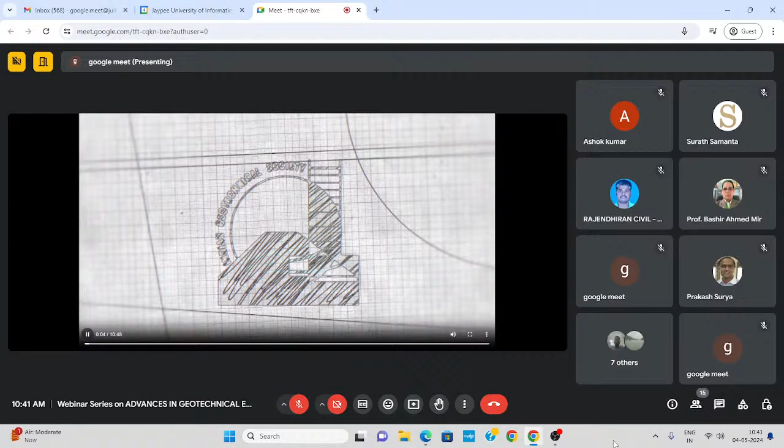The Indian Geotechnical Society, which was earlier known and founded under the name of the Indian National Society of Soil Mechanics and Foundation Engineering, was established in 1948. This came soon after the Second International Conference on Soil Mechanics and Foundation Engineering held in Rotterdam.

The society was affiliated to the International Society in the same year, and since then it has strived to fulfill and promote the objectives of the International Society. The name Indian Geotechnical Society was adopted in 1970.

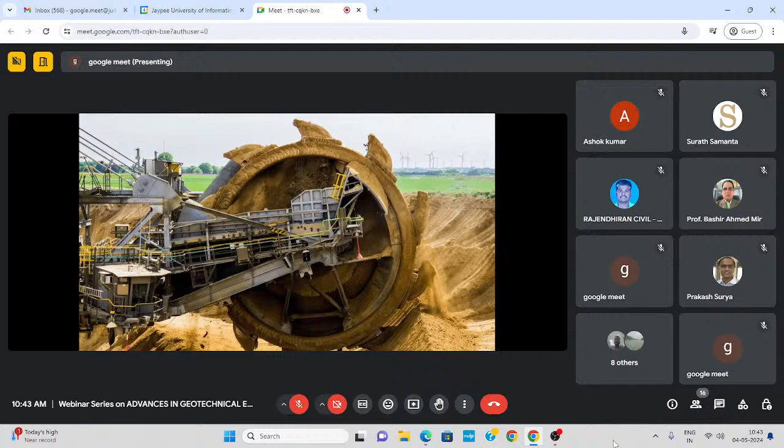The vision of the founding president, Mr. Khosla, and the honorary secretary, Dr. N.D. Gulati, was to build the society to promote cooperation amongst engineers and scientists for the advancement and dissemination of knowledge in the fields of soil mechanics, foundation engineering, soil dynamics, engineering geology, rock mechanics, snow and ice mechanics, and allied fields and their practical applications.

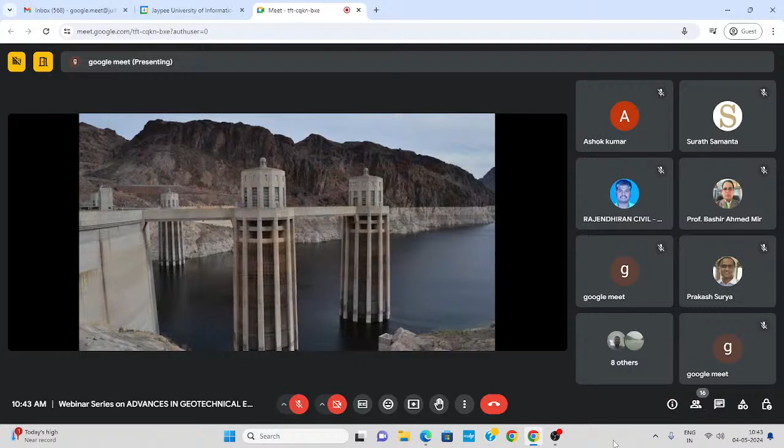As the geotechnical community started to grow, the International Society decided to have regional conferences for each continent, along with having 4 yearly international conferences. This is when the first Asian Regional Conference was held in 1960 in New Delhi. India also hosted the 5th Asian Regional Conference at Bangalore in 1975 and the 13th one at Kolkata in 2007.

IGS has been organizing national conferences annually in different cities since 1961. The Silver Jubilee Conference was held at Kurukshetra in 1973. 1978's GeoCon was a landmark conference held at IIT Delhi, which was inaugurated by the then Prime Minister Morarji Desai.

IGS started the prestigious annual lecture in 1978, a tradition followed till date. The first one was delivered by Professor R.K. Katti. Several others who delivered the annual lectures include Professor Dinesh Mohan, Professor T. Ramamurthy, Dr. R.K. Bhandari, Professor Gopal Ranjan, Dr. B.G. Rao, Dr. N.V. Nayak, Professor G.V. Rao, Professor A.V. Shroff, and most recently, Professor M.N. Viladkar.

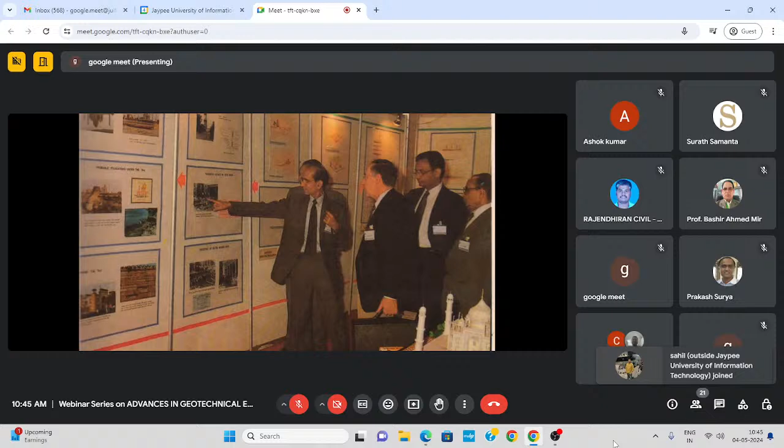IGS made an impressive debut in the international scene in 1994 with the organization of the 13th International Conference on Soil Mechanics and Geotechnical Engineering that was held in New Delhi. This was one of the biggest conferences in the history of the International Society, and it firmly put India on the international map.

24 years ago, in 1994, the Indian Geotechnical Society organized the 13th International Conference on Soil Mechanics and Foundation Engineering in New Delhi. This conference was a great success. Everything went perfectly as planned: its technical sessions, its exhibition, its field trips, its delegate interaction, its companions program, its entertainment, and hospitality.

Dr. Parry, the Secretary General of the International Society, in his concluding remarks, branded the conference as the Magic Carpet Conference. The turning point came from the 12th Asian Regional Conference in Singapore, which saw more than 20 Indian participants and the keynote lecture by Professor Madhav. We were successful in winning the next ARC at Kolkata and also Professor Madhav as Vice President for Asia for the term 2005 to 2009.

The major visible contributions from Indian Geotechnical Society have been in the latest 21st century. A large contingent had attended the Singapore Asian Regional Conference, followed by election of Professor Madhav as the next Vice President for the term 2005-2009. Several members of IGS have been members of the technical committees,

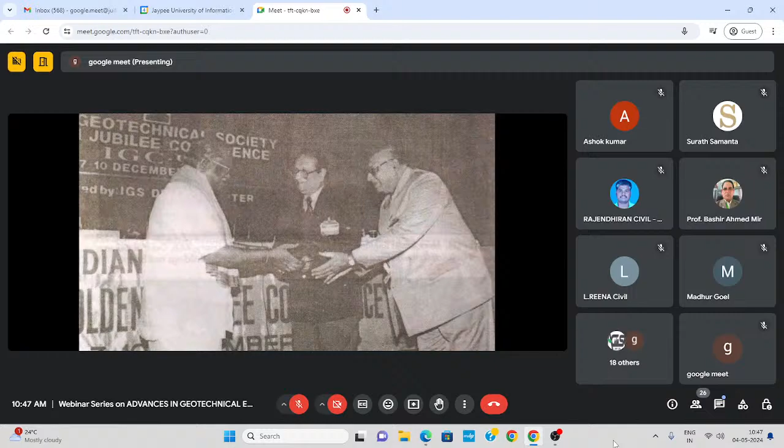The Golden Jubilee Conference was held in 1998 at Delhi. IGS has hosted the council meeting of ISSMGE at Bangalore and the 6th Asian Young Geotechnical Engineers Conference very successfully, thanks to great efforts by Professor Sitaram, Professor Srinivas Murthy and the team. IGS was successful in bidding for the 6th International Conference on Environmental Geotechnics to Delhi in 2010, which was a great success due to Professor Manoj Datta's great efforts.

The international community has become aware of our true potential, with several of our members becoming active in several technical committees of ISSMGE. IGS has a full-fledged office in New Delhi catering to the needs of its members. IGS publishes a quarterly journal since 1962. It is now accessible online to all IGS members free of cost.

Since 2012, the journal is being published by Springer for qualitative improvement and international reach. It has wide circulation and is retrieved internationally. IGS also publishes a quarterly newsletter to keep its members abreast of all geotechnical events.

IGS operates through its local chapters that keep its flag high in different cities of India. With 44 active chapters, IGS has spread its reach to every part of the country. Some of the active local chapters include Delhi, Roorkee, Mumbai, Indore, Pune, Goa, Surat, Bangalore, Chennai, Kolkata, Guwahati, and several others. To encourage the chapters, an annual Best Chapter Award was instituted in 1995. The Delhi chapter has won this award a record 5 times.

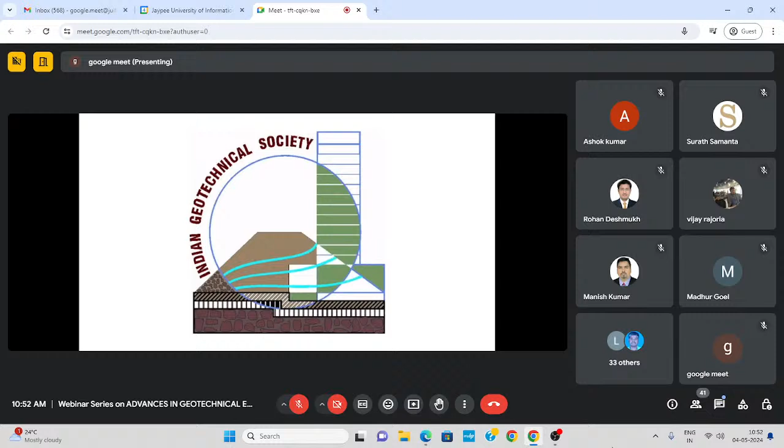Nestled among the mighty Himalayas stands a temple of education, an institution that shapes young minds of today into ambitious, conscientious, and dauntless individuals. Individuals who will become leaders of tomorrow. This is Jaypee University of Information Technology, Solan, where education meets excellence. Conceived as the joint vision of the Government of Himachal Pradesh and the founder-chairman of Jaypee Group, Shri Jaiprakash Gaur, JUIT Solan is the first private university of Himachal Pradesh, established in 2002.

Over the last 2 decades, JUIT Solan has been relentlessly pursuing its mission of contributing to a better world by cultivating creativity and advancing fundamental knowledge through education among students. Adorning the picturesque slopes of Waknaghat hills in the Solan district of Himachal Pradesh, the university campus spread across 25 acres provides a peaceful and serene setting in the lap of nature for young minds to hone their skills for a brighter future.

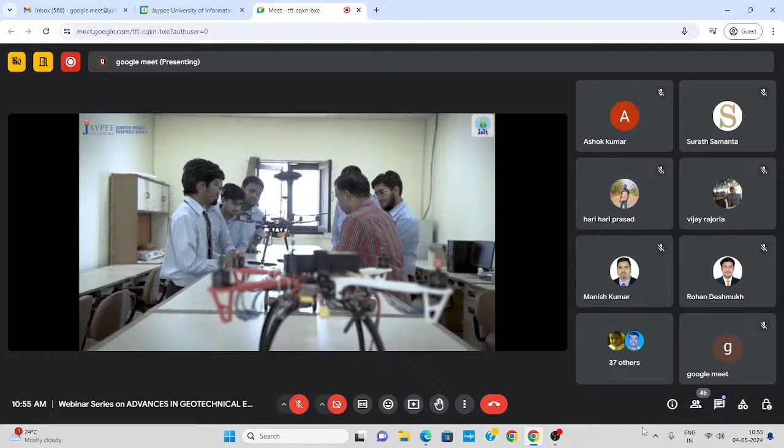As Dean Academics and Research, I have had the privilege of witnessing a remarkable journey here. We aim to provide an educational opportunity to one and all, irrespective of their background. In JUIT, our main aim is to produce industry-ready professionals and good human beings. From the beginning, our institution has been known for its research and innovation, and now it emphasizes interdisciplinary research and collaborative work. We are also aligning with the principles of NEP 2020, and following NEP, we are preparing the students to excel in their professional journey.

We have been continuously ranked in NAAC and NIRF. Now we are also ranked in international rankings such as the Times Higher Education ranking and QS ranking. We regularly upgrade the IT infrastructure at our university. Recently, we have added a good number of new machines in various labs. With modern hostels for both boys and girls, faculty residences, a healthy and hygienic students' mess, auditorium, sports facilities, and other amenities.

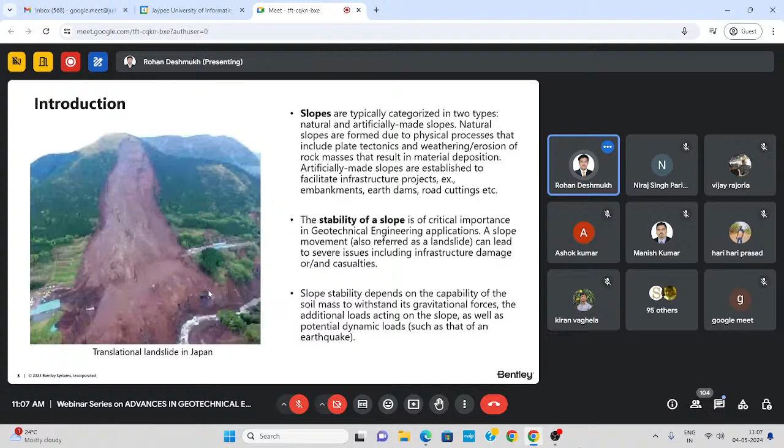Okay, so this is all about the introduction about the slopes. Now, what are the different reasons or the causes which lead to slope instability or slope failure? So the very first and the very common one is the increase in weight of the soil because of saturation, because of wetting. That is the main predominant reason behind many slope instabilities.

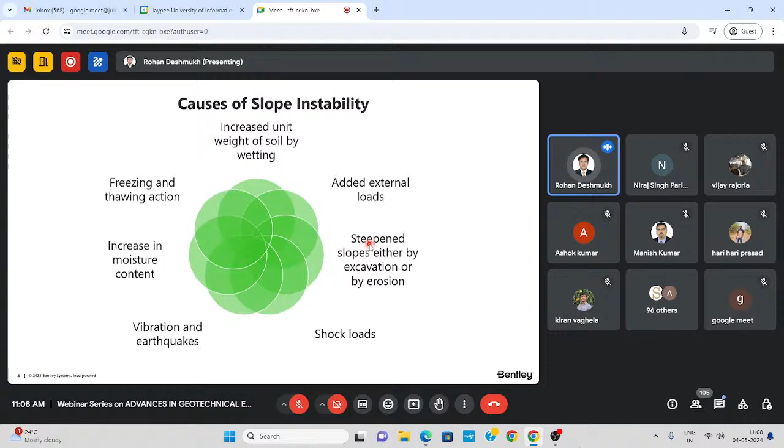Added external loads: as I just mentioned, some external loads at the top of your slopes may cause slope instability. Sometimes steepened slopes, either by excavation activity or because of erosion, are also one of the reasons. Shock loads, vibrations, earthquakes, those dynamic loads also sometimes trigger slope instability. Increase in moisture content, and in some regions the freezing and thawing action is also responsible for causing slope instability.

Now, I'll just show you some typical modes of failure and some types for a slope failure. This is suggested by Varnes in 1978. So the very first type of slope failure, which happens mainly with rocky material, is falls, where you can observe simply downward movement of rocky material. You can see that simply our rock material gets detached from its parent rock, and in the case of falls, that movement is in a linear pattern. You can see this rock fall in figure 1A, and this is an actual example from Spain, that is the rock fall.

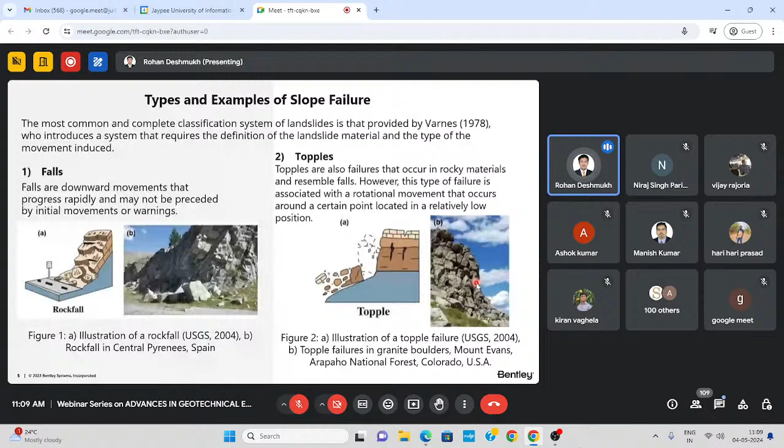Now coming toward the second mode of failure, that is topples. It is similar to that of falls. Our rocks get detached from the parent rock, but along with the linear motion, sometimes rotational motion is also there for the detached rock material. You can see this is an example from Colorado, USA. That is the topple kind of failure, where rocky materials get detached from the parent rock, and along with the translational motion, there is rotational motion for the detached rocky material.

Now regarding the slide, this is another mode of failure. It is mainly when the applied shear stress is more than the shear strength of our soil or rock, and this leads to a shear failure. Again, slides are of two types. One is the rotational kind of slide, which you can see in figure 3, and there may be a translational slide, simply downward movement of the soil material. You can see the rotational kind of failure in figure 4, and this is the example from England, which happened in 1993.

And this is the translational kind of slide, the translational slide failure. This is the example from Japan, and the reason behind it is seismic activity. An earthquake is responsible for this kind of slide failure or landslide failure. This is the case from the year 2016.

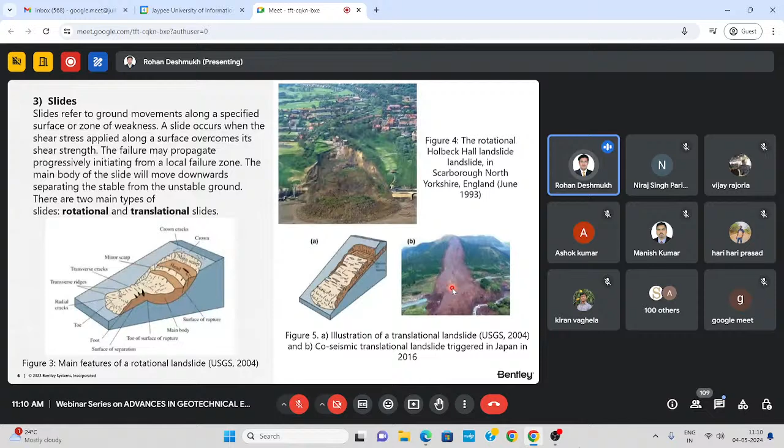Further, you can see another mode of failure, that is lateral spread, and it is mainly because of liquefaction and happens in the case of saturated soils. Because of shaking or an earthquake, the shear strength gets completely lost for a saturated soil, and this kind of thing happens. You can see this is the lateral spread that happened in Pakistan, and there is complete damage to this road or highway.

Another mode of failure is flows. The failures which we cannot categorize in the earlier four categories, we categorize in the flow category. So what will be the flow kind of failure? Simply your soil material or rock material flows along an inclined path. You can see the debris flows or the debris avalanche. These are a few examples of the flow kind of failure.

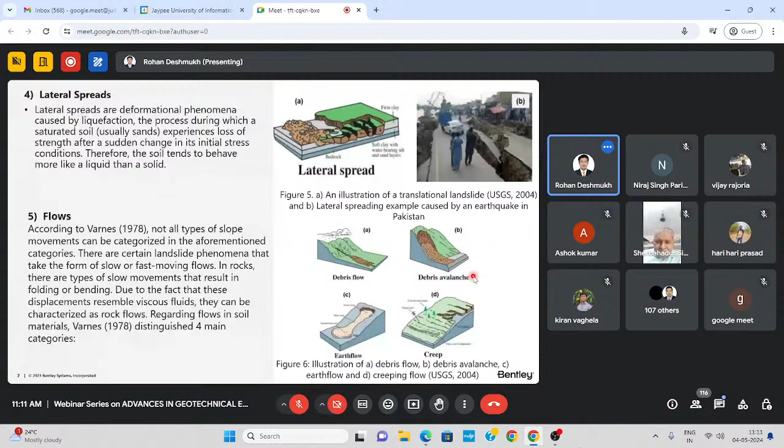Now we just discussed the different modes of failure, and now coming to India. There are a lot of examples where slopes failed because of several reasons. These are a few news cutouts which I have taken about the mishappenings or landslides which happened throughout India. This is the case from Kerala from the year 2022.

You can see that this road completely got blocked because of this landslide. This is another example from Kerala itself. You can see that massive translational kind of sliding is happening along this region. The whole soil material is completely washed out. This is another from the northern part of India.

Okay, almost 46 got killed because of this mishappening, because of this landslide. This is another photograph from the Himalayan region, over 50 killed again in that, and the rain is the factor which triggered this kind of a failure.

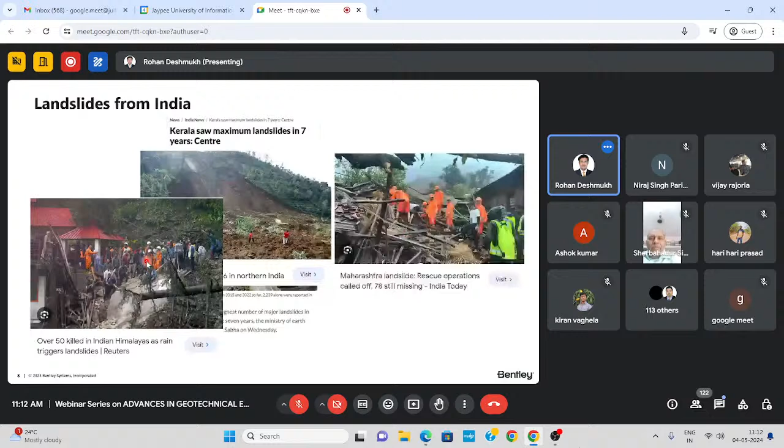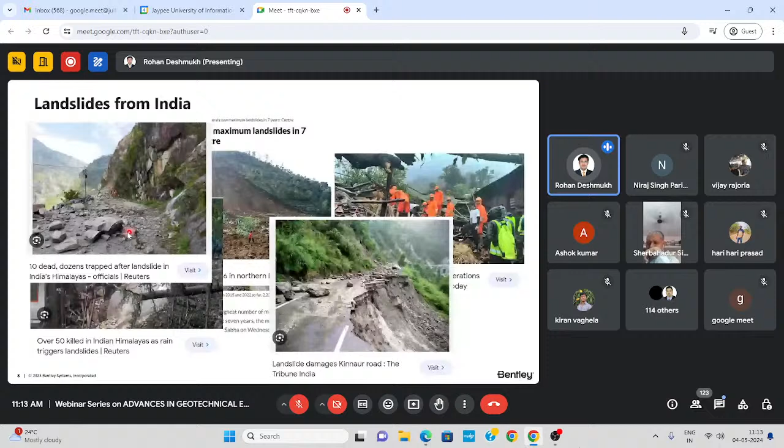This is another case from Maharashtra. This is another photograph where the landslide damaged this road. You can see that a portion of the road has completely washed out. Okay. This is another example. You can see that rock particles get detached from the parent rock, and they are now on the road surface. And this is again an example from the Himalaya.

So the project authority should carry out numerical model studies of vulnerable slopes, which means the critical slopes, using either a limit equilibrium approach, or the finite element, or the finite difference method to find out the factor of safety for the vulnerable slopes or the critical slope.

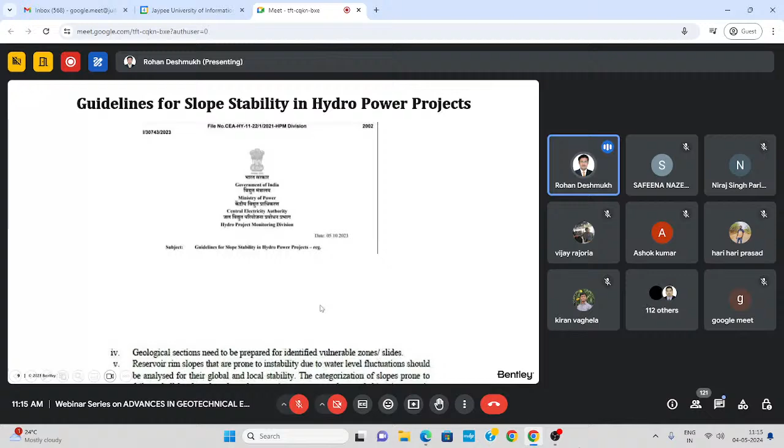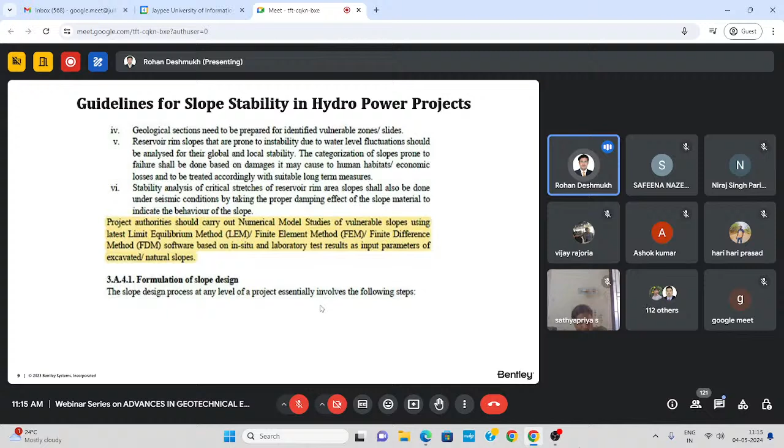So these guidelines clearly indicate the role of software tools or different numerical techniques to find out the factor of safety for critical slopes. Of course, the input data is again important in this case. You need to carry out in-situ tests and some laboratory tests to give proper input data so that we can get the appropriate factor of safety for our critical slopes.

Now, coming towards the main point of discussion, that is the methods of slope stability analysis. I distinguish the slope stability analysis methods into two. One is the limit equilibrium approach, and the second one is the numerical method of analysis. In the numerical method of analysis, there is continuum modeling, discontinuum, and hybrid coupled modeling. And in limit equilibrium, which is very common for factor of safety determination for slopes, there are a lot of methods: the Swedish circle method, ordinary method of slices, the modified Bishop's method, Janbu's method, Spencer's, and the Sarma method. Now we will see the limitations and advantages of each method.

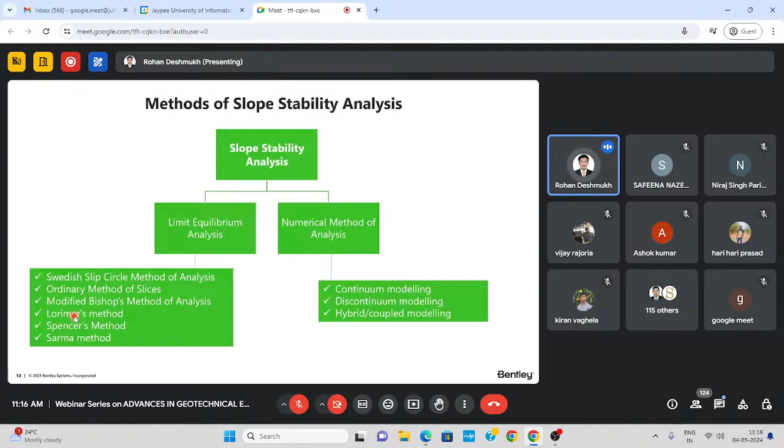So coming to limit equilibrium analysis, as I mentioned, it is the most common and widely used slope stability method. But there are a few assumptions behind limit equilibrium analysis. Let's try to understand those. This type of analysis is based on the assumption that the slope is on the verge of failure and that the forces acting on the potential failure surface are in equilibrium. This is the very fundamental assumption behind limit equilibrium analysis.

And as I mentioned, there are a lot of different methods of slices, like the Fellenius method, Bishop, Spencer, and Morgenstern-Price methods, in which we divide our slopes into either vertical slices or sometimes horizontal slices. In all these methods, we try to find the horizontal forces, vertical forces, and even the interslice forces for each slice. Finally, we find the factor of safety based on some equation. We'll cover that equation in the upcoming slides.

Another limitation of limit equilibrium analysis is that, of course, it is very fast. It is compatible with many geotechnical software, and relatively very simple, this limit equilibrium method of analysis. But sometimes when we are going with the limit equilibrium analysis, it neglects the effect of pore water pressure. I'm saying in some cases or with some software tools.

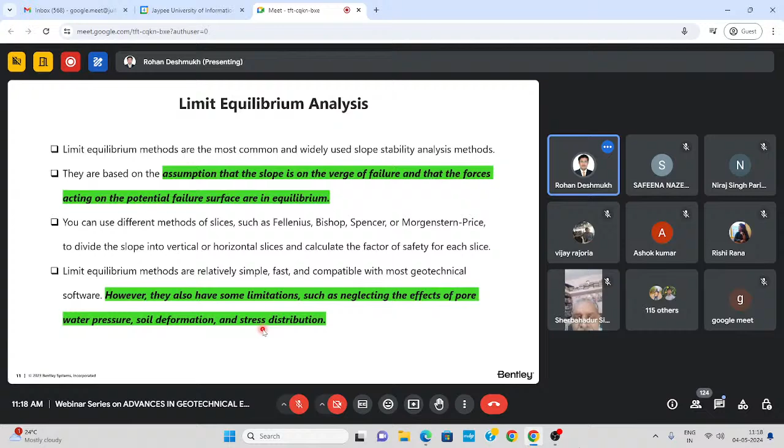And also it neglects the soil deformation analysis and the stress distribution. These things get neglected in many of the geotechnical software tools when we are going with the limit equilibrium approach. Now let's try to understand the different methods, the assumptions behind them, the equations that we use, and what is the probable slip surface that we assume for every method.

Of course, as we know, the slip surface or the failure pattern is not completely circular, or it is not completely linear. It can be of any shape. But for simplicity in the analysis, these methods assume that the slip surface or the failure surface may be circular or maybe of any other shape, or some methods are not assuming anything.

So the very first method is the ordinary method of slices, published in 1936. The very fundamental assumption in this method is that the resultant of side forces is parallel to the base of the slice, which is not true in every case, because our resultant is not parallel to the base of every slice. It may be horizontal, it may be a little inclined. But they are assuming this to make their analysis simple.

And the equation used in this to get the factor of safety is the overall moment. So the horizontal forces and vertical forces are neglected in the ordinary method of slices. So this is, I can say, the limitation of this very old method.

Then the assumption behind Bishop's method, published in 1955, is that the resultant of the side forces is horizontal. This is not true in every case. And the equations that they use are the overall moment and the vertical forces. Again, the horizontal forces are missing in the equation. And the slip pattern or failure pattern assumed in the Bishop method is again circular. That is again not true in the real scenario.

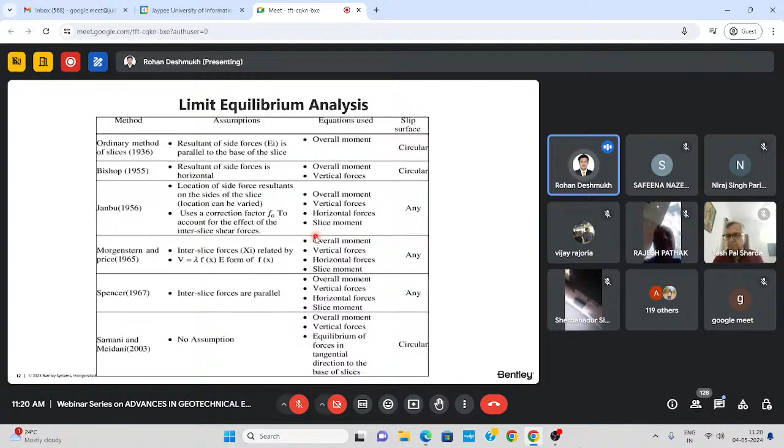Similarly, for Janbu, Morgenstern-Price, Spencer, and Samani and Meidani, I have mentioned their assumptions, the equations used, and the slip surface that they assume in their analysis. So not every method is accurate from the field point of view, but of course, approximately, we get some values. Similarly, I have mentioned assumptions for the other methods: Spencer, Morgenstern, Fredlund-Krahn, Corps of Engineers, and Sarma.

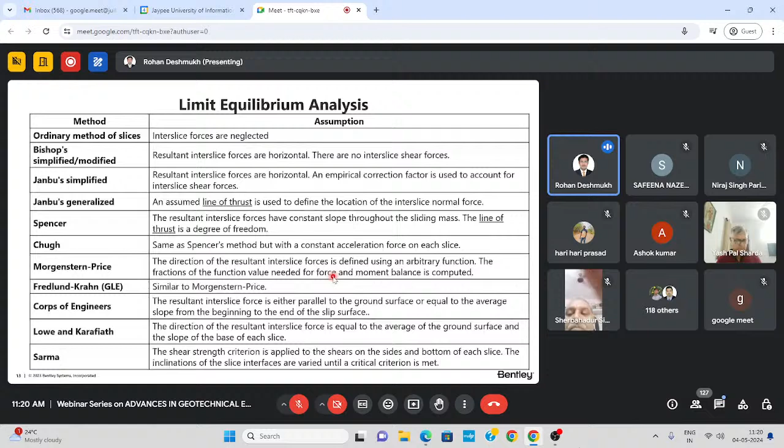Now I'm moving ahead because I need to cover a lot, the case study as well as the demonstration. Now coming to finite element analysis. This is a more advanced and sophisticated slope stability analysis method. Of course, it also has some limitations, which I'll cover in the upcoming slides. Finite element analysis uses equations of equilibrium and constitutive laws for the soil material. Constitutive laws means our regular Mohr-Coulomb material model is used to determine the factor of safety by solving these numerical equations of equilibrium.

Of course, the add-on in finite element analysis is that you can go with either a plane strain approach, an axisymmetric approach, or a three-dimensional approach to create your slope geometry and the boundary conditions. So I can say this is the add-on over the limit equilibrium approach. Of course, we can do many of these things with the limit equilibrium approach also, like plane strain, axisymmetric and 3D.

Another advantage of finite element analysis is that we are able to consider the effect of pore water pressure in our analysis. We are also able to capture the soil deformations and the stress distribution in our slope area. So that is some add-on over limit equilibrium in the case of the finite element method. Along with that, we are also able to simulate the different stages of loading. We can do loading, unloading, or perform a consolidation analysis.

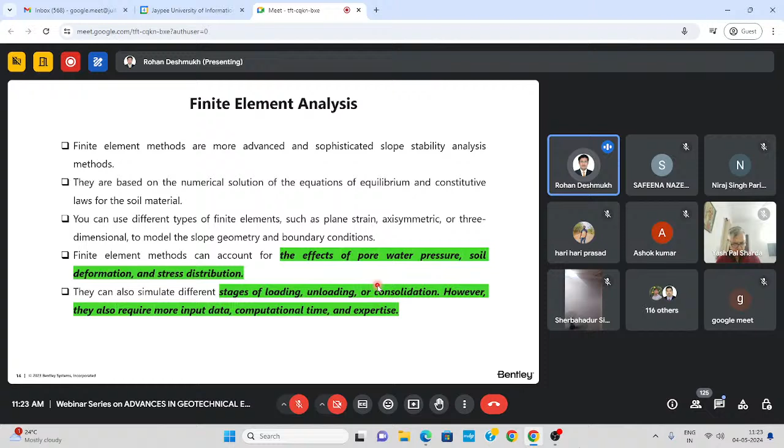Now, what is the mechanics or the mathematics behind the finite element analysis? Let's try to understand that, because we just run the software and we get the factor of safety, but many times people don't know how Plaxis or this software tool calculates that factor of safety for our slopes. So the phi-c reduction method we are using in the finite element approach. So what is this phi-c reduction method basically?

So factor of safety is calculated as the available soil strength divided by the mobilized soil strength. So what is the meaning of available and mobilized soil strength? Initially we are giving some input to our soil material or rock material in terms of the C and phi value, cohesion and angle of internal friction. So what is the software doing? It applies some out of balance force. It means we are actually applying some shear strain on our structure, and we're trying to make it fail.

During that process, the software is continuously decreasing the shear strength C and phi value, and checking where it fails against that applied shear stress. That reduced value we are considering at the bottom is the mobilized soil strength, and the input data at the top is the available soil strength. We take the ratio of these two, and by that we calculate the factor of safety. So the summation of MSF is nothing but the factor of safety that we are calculating.

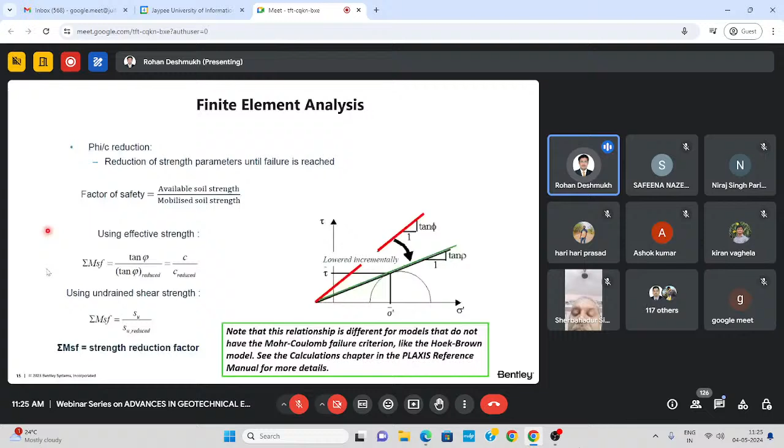Again, this equation that I have mentioned here is applicable only when you are using the Mohr Coulomb material model for your soil or rock. When you're going with the Hoek-Brown material model, this equation is not applicable. So for that case, which equation is applicable? I suggest you refer to the Plaxis reference manual, or just Google, and you will get that equation for finding the factor of safety with the Hoek-Brown material model. This equation is applicable only with the simple Mohr Coulomb failure criterion.

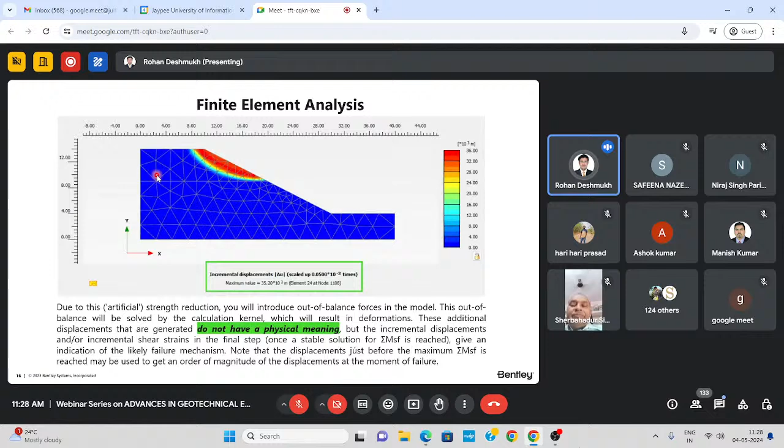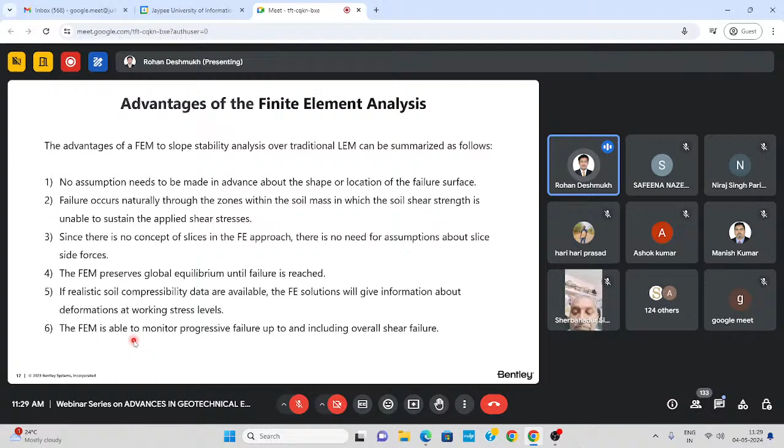But as I mentioned, some limitations are also there for the finite element method. For the determination of factor of safety, in the case of finite element, we are using the strength reduction method, that is the phi-c reduction method. Of course, it is a very powerful technique to get the critical slip surface or critical failure surface. But many times, our point of interest is not just the critical surface. We need a factor of safety at some other locations apart from the critical failure zone.

However, there are some circumstances where more information is required than just the most critical slip surface, or when the critical slip surface is of minor importance. So, what are those circumstances, where apart from the critical slip surface, we need to see the factor of safety at some other locations? I have summarized a few situations where apart from the critical or global factor of safety, we need the factor of safety for other locations.

First example, for a large dam, both global stability as well as the stability of the slope section in between the berms must be determined. I'll try to cover it with this image. You can see in this figure, this is the upstream side of my dam, this is the berm we have given over here, and this is the downstream face. With Plaxis or the finite element approach, we are able to get only this kind of critical failure surface over here. But if my point of interest is this location, I'm not able to get the factor of safety for this location. That is the limitation of finite element analysis.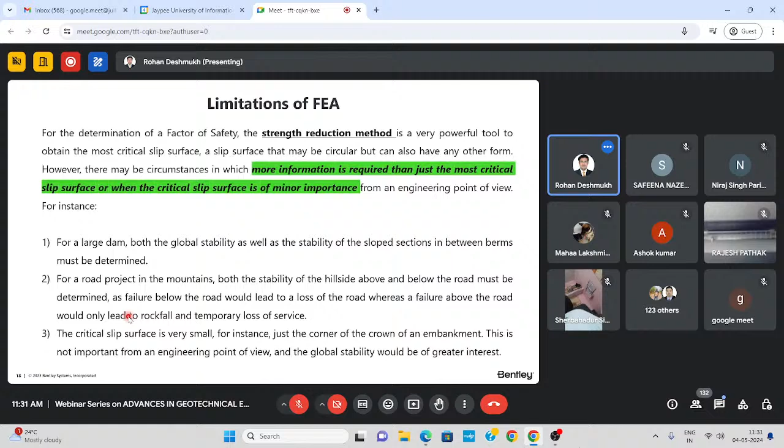So we need to check the factor of safety above and below my road portion. Okay, so that is another scenario where the finite element analysis is lacking. So these are the few instances where our finite element approach has some limitations, because we are able to get only the critical failure surface with the finite element analysis.

So in such a situation, you need to go with the limit equilibrium approach, because in limit equilibrium you can set where you want to find out the factor of safety. You can just set this portion. If your interest is this portion only, just set it as an input parameter, give the entry and exit point in the software. You will get the factor of safety for this region only. So that flexibility we have in the case of limit equilibrium software or the limit equilibrium approach.

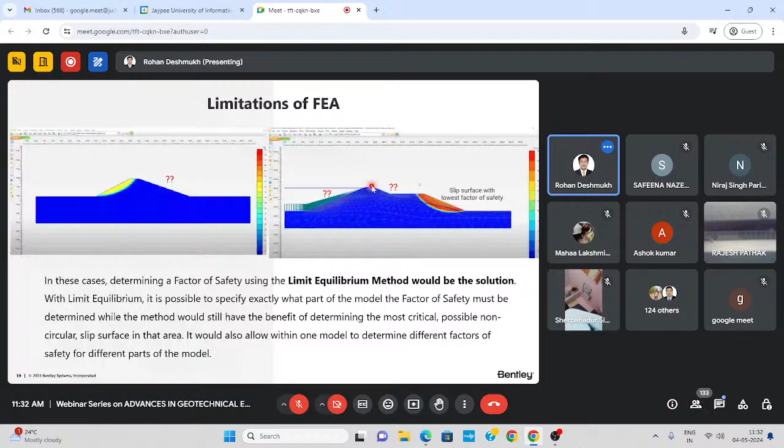So I'm just concluding the theoretical part that we have discussed till now. The actual demonstration and the case study still remain. So just be with me.

So as I mentioned, in the case of the finite element approach, the factor of safety emerges naturally without the user having to commit to a particular form of failure mechanism. So in the finite element approach, we did not give the prior failure pattern, whether it's circular or linear. Further, there is no need to specify a range of trial surfaces. In the case of limit equilibrium software, we need to give the ranges of trial surfaces, 1,000, 100, like that. That is not needed with the finite element approach.

And also, there is no concept of slicing in the FE approach, which we discussed. So the assumptions about the slice forces, we are neglecting that part in the FE approach. So that is the good thing with the FE analysis.

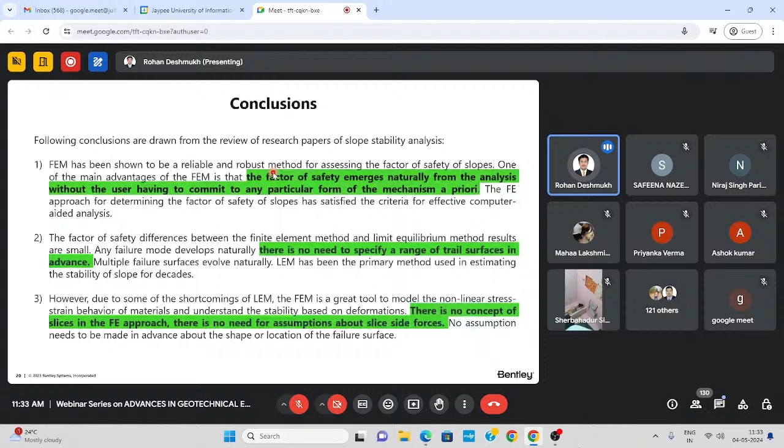Now I'm moving to one simple Plaxis example, which gives you more idea of how the factor of safety changes when we go with the finite element approach and when we go with the limit equilibrium approach. So I'll just try to show you that difference. I have already made this example and already run this problem. But just for your understanding, I'll show you the properties of the soil that I have taken.

Just make me clear, my screen is visible to everyone and I'm audible. Just give me a confirmation. Yes, sir. Okay, thank you.

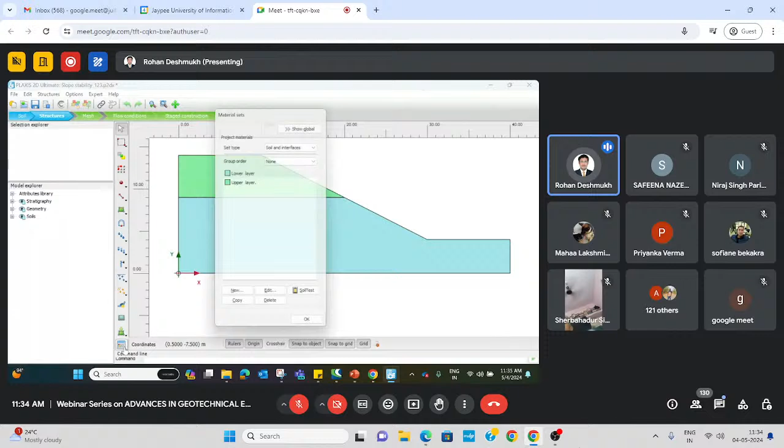So here, for simplicity of understanding, I have taken a very simple example of a slope. I have considered two soil layers, named the lower layer and the upper layer. I'll just show you the properties I have taken for the lower layer. The unit weight values are 17 and 18 kilonewton per meter cube. And the material model I have used is the Mohr-Coulomb model, so the phi-c reduction method is applicable in this case.

Now, coming to the mechanical properties, the modulus value you can see here is 15,000 kilonewton per meter square. Poisson ratio is 0.25. C value is 4 kPa and the phi value is 20 degrees, which I assumed for the lower layer material. Likewise, I created the upper layer also.

Just coming back to the staged construction. You can see here I ran two different phases. One is the deformation phase and the second one is the factor of safety. My main point of interest is to see the factor of safety for this particular slope. See the geometry as well: the top width is 10 meters, and this inclined face is almost 20 meters. Right now I'm not able to get the angle of this slope, maybe around 30 to 40 degrees. You can see these phases are already run.

So I'm now just moving toward the output, to see how much factor of safety there is for this kind of geometry, for this kind of slope.

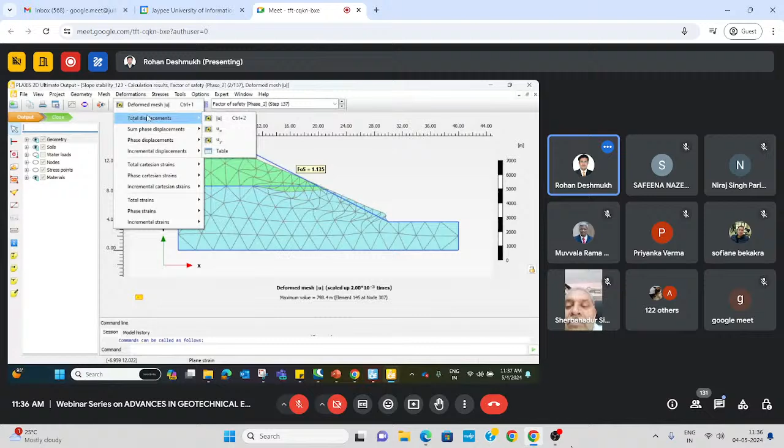So I hope you are able to see the output. So I'm just showing you the deformation, how the failure developed. And I'm just going to the total displacement. You can see this failure will happen like this. But if you see the displacement values, they are almost 800 meters.

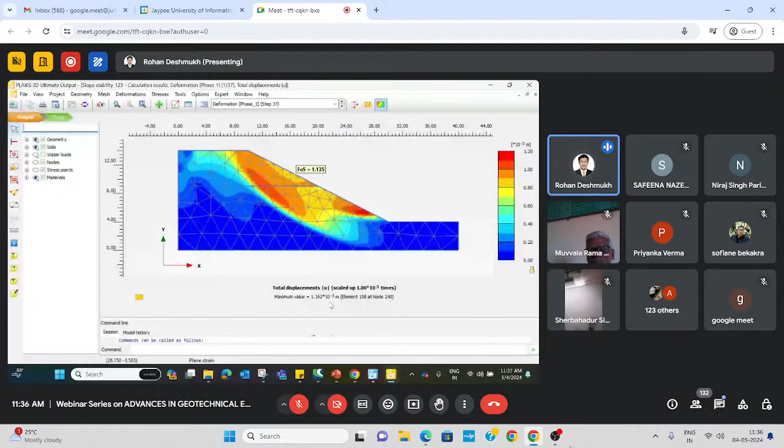Okay. So of course, as I mentioned, this does not have a physical meaning, because right now we are checking the safety analysis. But when I'm shifting toward the deformation phase from this drop-down menu, you can see the deformation is just 1.16 × 10^-3, means 1.16 mm. Again, I'm shifting toward the horizontal displacement. So these are the horizontal displacement values.

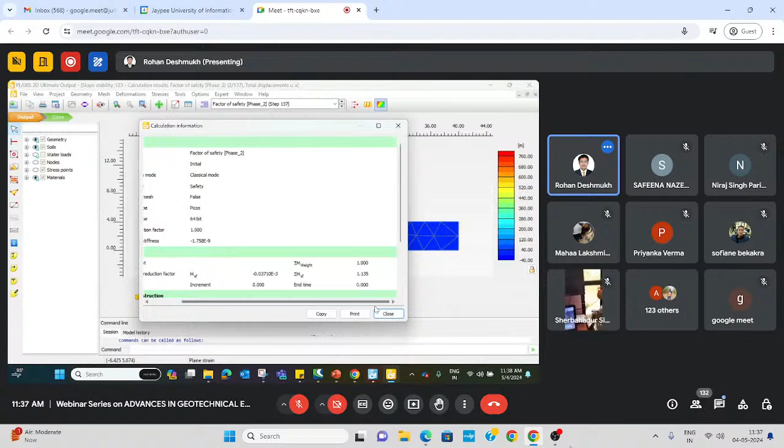But the main point of discussion in this is the factor of safety value. So how to see the factor of safety value? For that, just go to the project, and in that, the calculation information. And our target is to see the summation of MSF, that is the factor of safety. And now it is 1.135. Just give me a second. The factor of safety in this is 1.135. Okay, so this is the finite element approach that we have adopted to get the factor of safety.

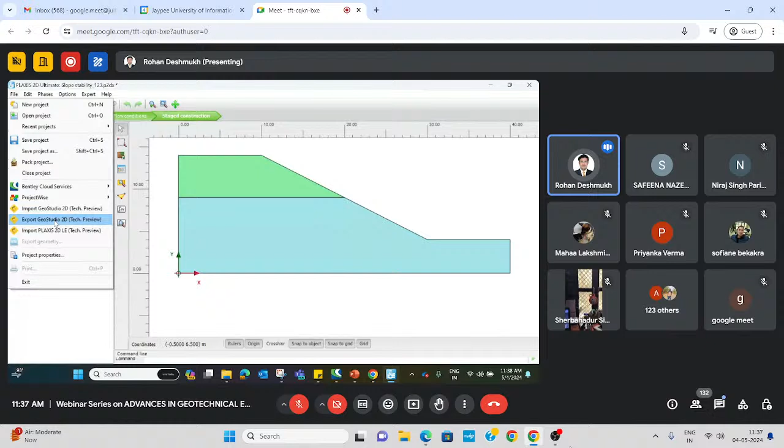Now I'm trying to solve the same problem with the same input data, same geometry, with the limit equilibrium approach. And in that, again, I'm going to use the Morgenstern-Price method, and let's see how much factor of safety we'll get. So with the finite element, we got a factor of safety around, let me check again, it is 1.135. Okay, now let's try to solve the same problem. I'm exporting this file to the GeoStudio software, where we'll adopt a limit equilibrium approach, that is the Morgenstern-Price method, to solve the same problem. It will take some time to import this file into GeoStudio. Just give me a moment.

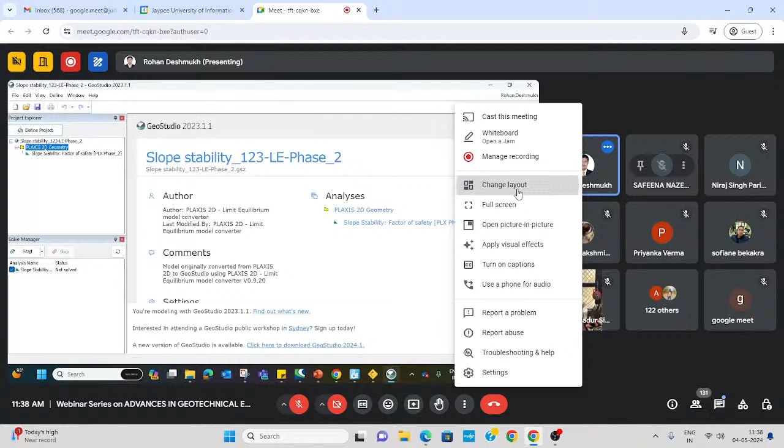Okay. So now we have imported our geometry from Plaxis to GeoStudio. You can see the upper layer and the lower layer and the other things. I'll quickly show you the method of analysis that we are choosing for this particular problem. I'm going to use the Morgenstern-Price method. And you can see the slip surface; the direction of movement is from left to right, and I'm using entry and exit points. So now I'm giving the entry and exit points, that is the input we need to give in the software. I'm suggesting this range for the entry point, and approximately this range for the exit point.

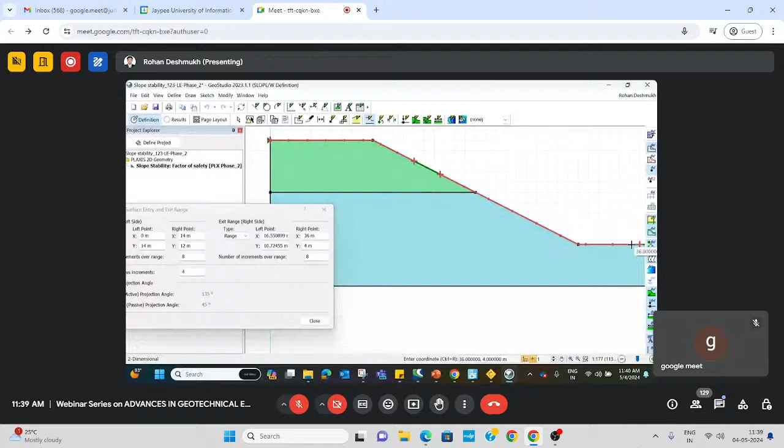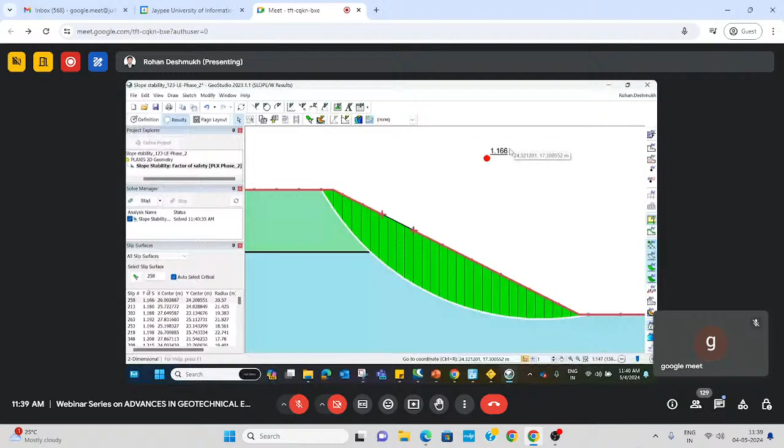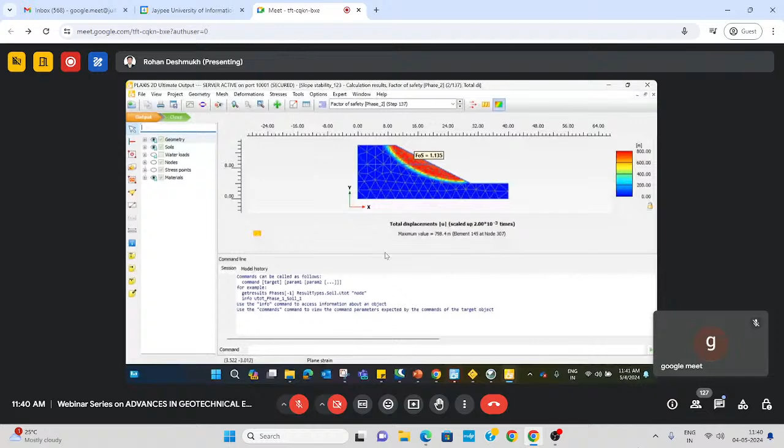Okay, now I'm just clicking on the start button to solve this problem. It will take some time to get the output. Yeah, now it runs perfectly. You can see that this critical slope is divided into vertical slices like this, which is one of the assumptions, and the factor of safety we got is 1.16. If you remember, the factor of safety we got with Plaxis is 1.13, something like that. I'll just quickly open the output of FEM. So this is the failure pattern, and the factor of safety is 1.135. And in GeoStudio with the Morgenstern-Price method, we got a factor of safety of 1.16.

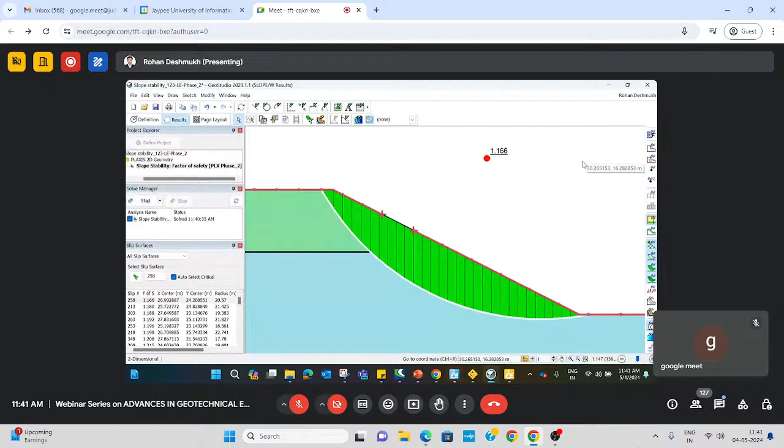But again, it may be because the model is quite simple. That's why we get nearly similar results. But if the geometry changes, or our entry and exit point locations change, this factor of safety changes accordingly. But I just wanted to show you that there's not a big difference if your geometry and material input data are more or less the same. Though there are a lot of assumptions behind the limit equilibrium approach, we are still getting approximately the same result. But of course there is a lot of information; if you change things here and there, you will get a difference in the result. Okay, that's about this problem.

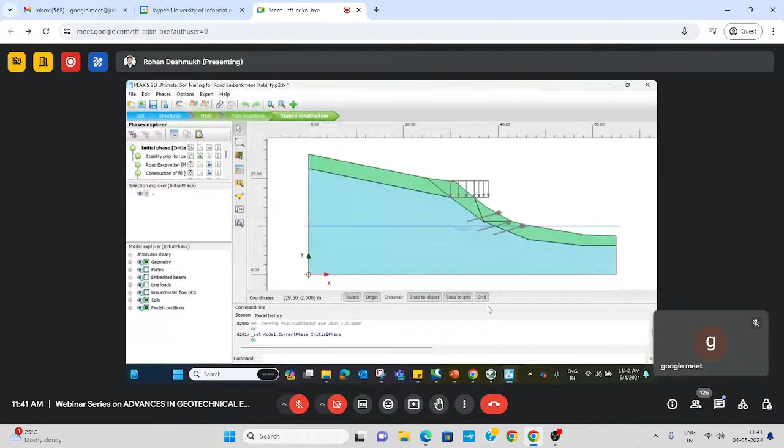Now I'll go toward one simple case study from New Zealand, which is a road construction project. So I'll just quickly show you the problem. This problem has already been run. I'll quickly discuss the geometry, the soil layers and the sequence of construction. You can see this is the top layer of the slope, and this is the bottom layer of soil. And the target is to construct a road at this location. The road width is of course going beyond the top layer of soil.

So of course we need to refill this portion to accommodate the total width of the road. For that purpose, first of all we excavated this portion of the soil, and then I added one more phase to create a fill at this location to accommodate the total width of the road. And then in the next phase, I constructed a road as a plate element

I have used over here. After constructing a road surface, I applied the traffic load. You can see that the load is now activated in another phase. After constructing the road and the traffic load, I conducted the safety analysis, factor of safety for this portion. And again I consider a very extreme condition.

Now you can see that in this phase the water level is somewhere here. In the other case, I simply raised this water level. So I'm simulating the rainfall condition or the saturated soil condition, and wanted to check how much the factor of safety gets reduced because of this increase in water level. So after this increase in water level, I again run the factor of safety analysis.

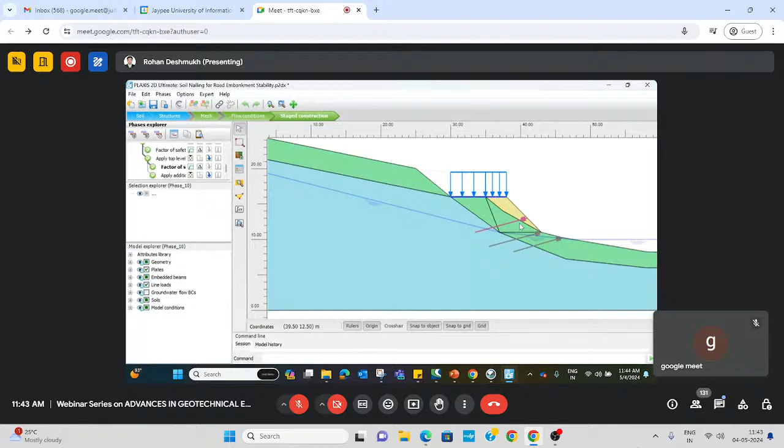And they found that the factor of safety is not as per the requirement, so that's why they provide a soil nail. After running this factor of safety, I am going to the top soil nail phase, where we activated this single soil nail in this failure pattern. And then again we check how much the factor of safety gets improved with one single soil nail activation. After that, we also activated the remaining two soil nails over here.

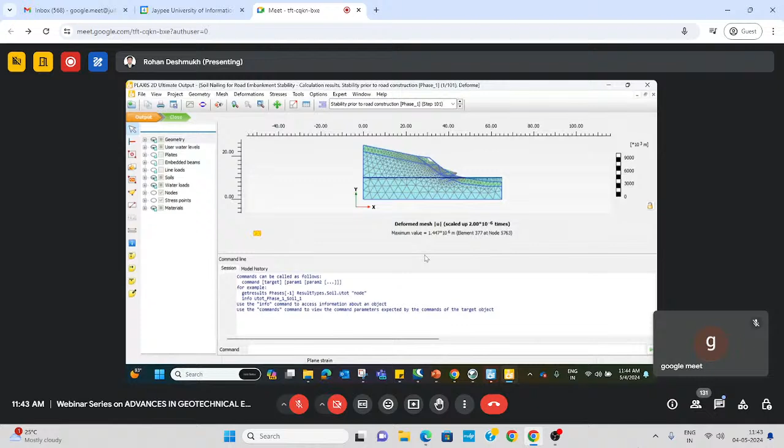So now let's come to the output. Now I'm showing you the output for our natural slope: no excavation, no construction, no soil nailing. How much factor of safety was there before the construction? I ran that analysis as well. I'll quickly show you the total displacement. So the failure pattern is likely to be this one.

And as I'm saying again, when you're checking the factor of safety phase, don't panic when you see this kind of deformation. It doesn't have any physical meaning. Now coming to the factor of safety, going to the project and seeing the calculation information. For the natural condition, the factor of safety is 1.25.

And now I'm moving to the other phases. I ran another factor of safety after the whole construction of the road, the filling of this extra soil over here, and applying the traffic load. Let's see how much factor of safety there is after constructing the road. Again, I'm going to the project and the calculation information. This time you can see the factor of safety is 1.48.

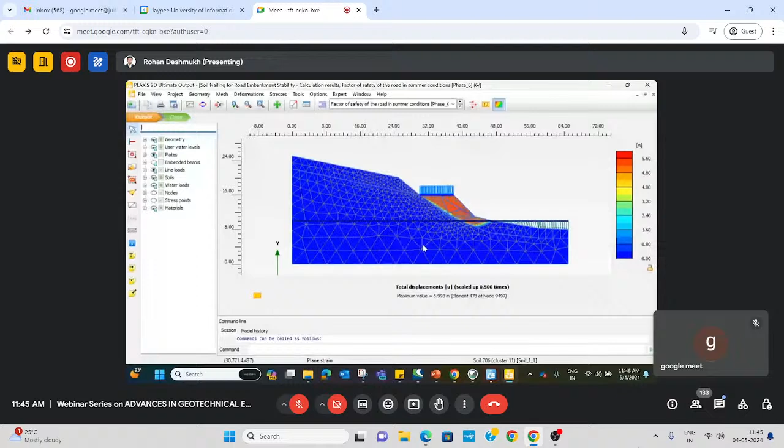Now there may be a question in your mind. Prior to road construction, the factor of safety was 1.25, so why did it improve to 1.48 after the road construction? That is mainly because we are constructing this reinforced fill, this improved property soil layer, to accommodate the road width, and because of this fill area, this good quality soil, the factor of safety increased a little. But still, the factor of safety is 1.48, not more than 1.5. So that's why they applied a single soil nail.

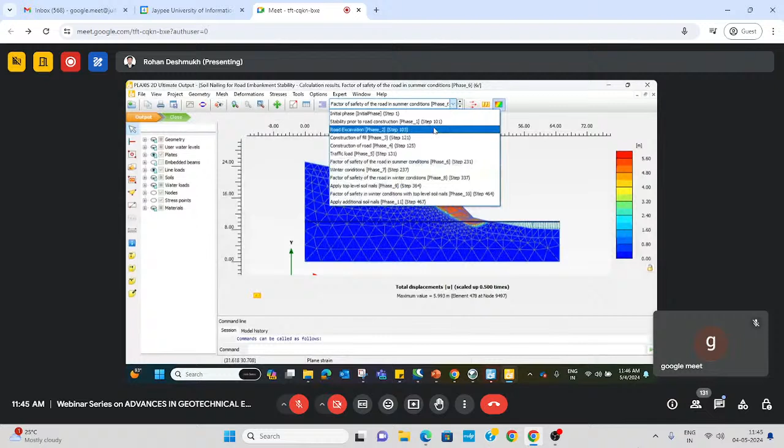But prior to that, I wanted to show you the effect of water on the factor of safety analysis. Till now the water level is at this location. Now I'm shifting this water level a little upward like this. Let's check how much factor of safety there is when the water level increases. We are simulating the rainfall effect, or the saturation effect. Let's take the factor of safety for this case: project, and calculation information.

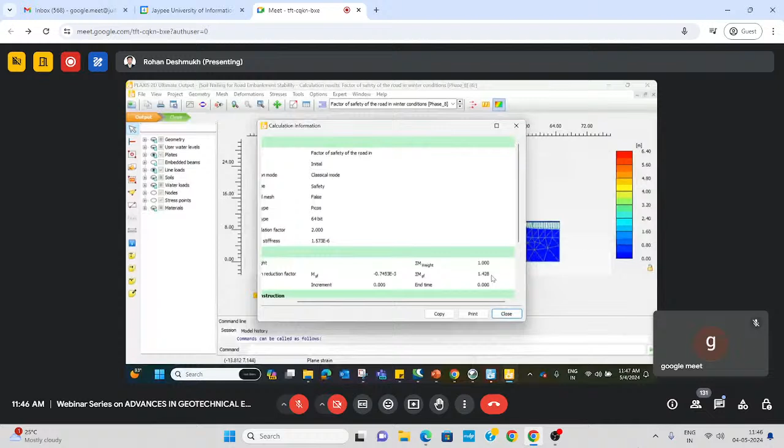You can see that the factor of safety is now reduced to 1.42. Before increasing the water level, the factor of safety was 1.48. Now it drops to 1.42 because of the increase in water level, or you can say the pore water pressure effect comes into the picture.

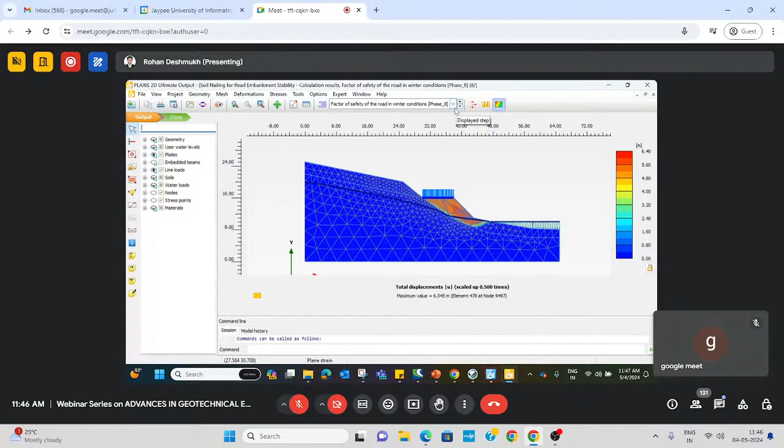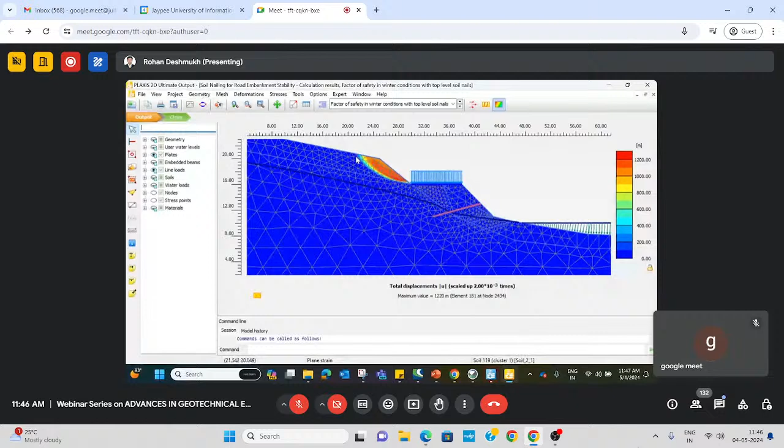Now let's see how much the factor of safety improves when we apply one top soil nail at this location. So I run the factor of safety analysis. Just after that, you can see the failure pattern shifting from this side to the top side. Now whatever factor of safety we are checking in this particular phase is the factor of safety for this critical slope, not for the bottom side of my road.

Another question is from Rasimaranjan: how to validate a slope stability problem experimentally? If you go to our fundamental UG books, there are a lot of slope stability problems. You can use any of the methods, such as the Swedish circle method or friction circle method, to get approximate results, and check your experimental result against them. The Bishop method and Swedish circle methods are there, so many methods with which you can validate your experimental problem.

Next question is from Pankaj Gupta ji: can we develop p-y curves for piles used to stabilize the slope during dynamic loading in PLAXIS? Yes, we are able to develop a load versus lateral deformation curve for your piles. It is possible, and for dynamic loading, yes, it is possible.

Next question is from Shweta ji. Sir, as you said we can't get the factor of safety for the lower portion of the slope, can we use FELA for calculating the factor of safety for the upper as well as lower portion, but continue our study further in PLAXIS? I think it's about the side-by-side application of FELA along with PLAXIS. Yes, along with PLAXIS you can do that. Okay, you can use it, of course, and the remaining things you can do with PLAXIS.

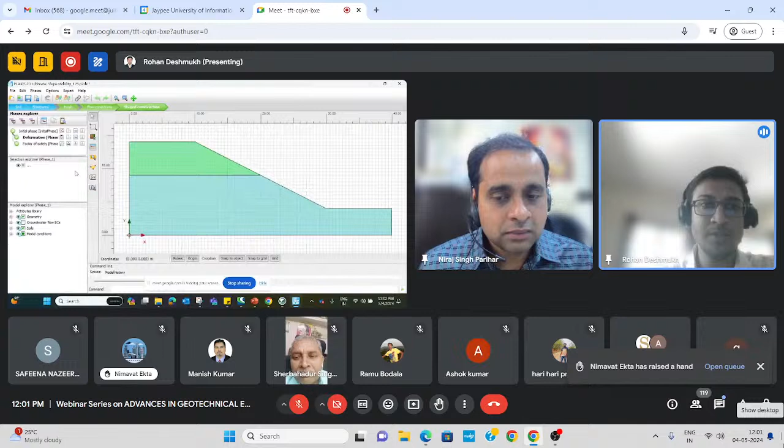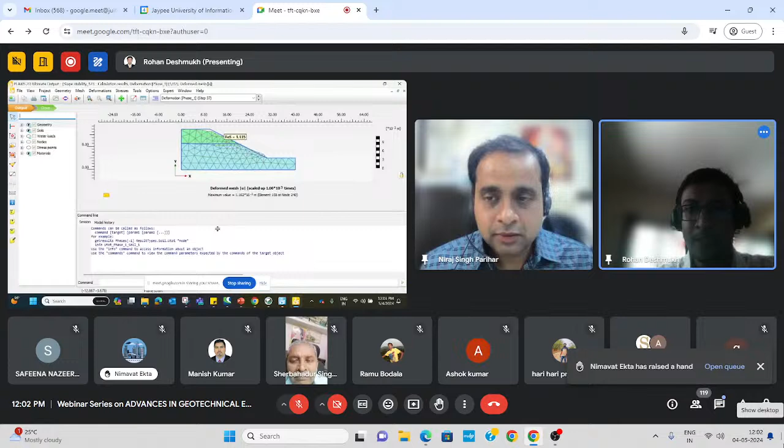This is the deformation phase I have run, and this is the factor of safety phase I have run. If I go into edit for the deformation phase, you can see the calculation type I have selected is plastic, meaning the deformation or stress-strain type of calculation. So the output of this phase is nothing but the deformation. You need to run a separate phase to check the deformation in the horizontal and vertical directions. Here you can see the deformation value is almost 1.16 mm for this case. So you need to run the separate phase to see the deformation values.

Right. Thank you, sir. There is another question from Pankaj Gupta ji. Sir, can you please demonstrate how we can develop the P-Y curve in Plaxis? Okay, I need to conduct a separate session for this one, because I need to model an actual pile and run the model, and then select the nodes at every point so that we can develop a curve for that. Definitely. When we organize the next part of this series, we'll definitely call you again, sir, for more demonstrations on finite element analysis.